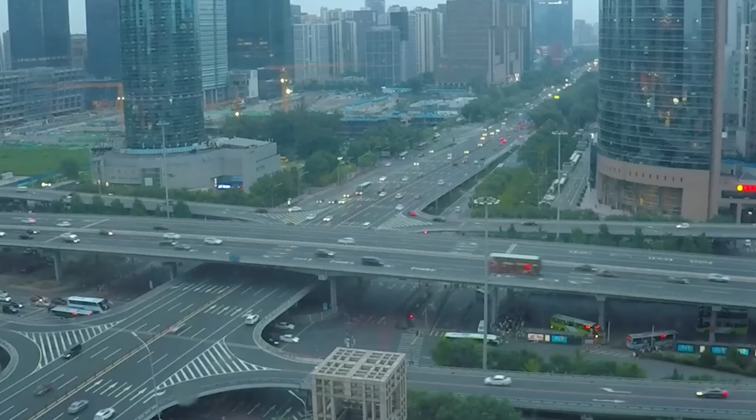Picture the last city you visited. Every overpass above you, every foundation beneath you, every high-rise cutting into the sky. Now ask yourself one question. What is holding all of it up? Not steel, not wood, not glass, concrete.

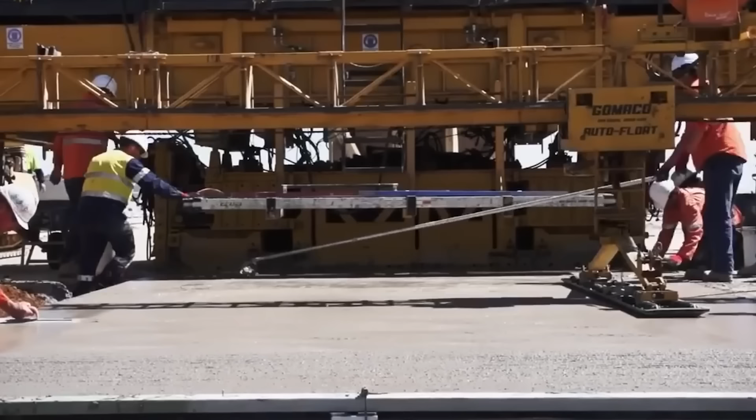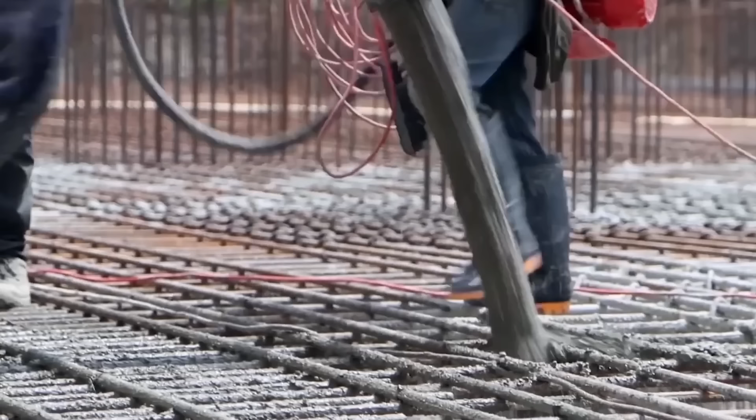The same material that built the Roman Pantheon 2,000 years ago is the same substance being poured into the ground right now as you watch this video. And for a century, the Western construction industry has been perfectly comfortable with that fact. Perfectly comfortable with a material that, by its own chemistry, pumps roughly 8% of all human carbon emissions into the atmosphere every single year. More than aviation, nearly as much as every road vehicle on Earth combined.

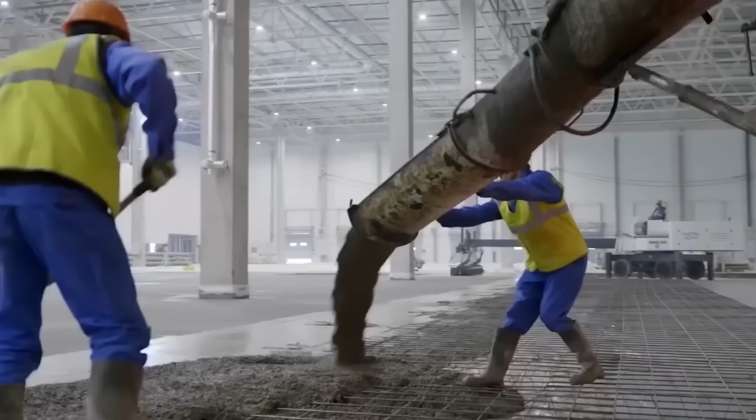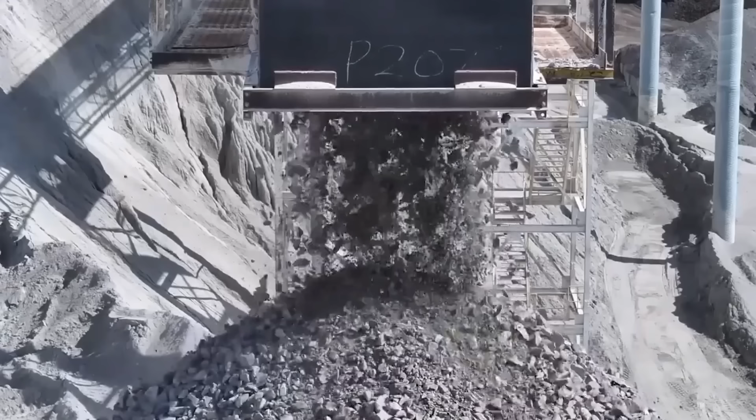But in 2025, a team of Chinese researchers published a finding that should have dominated every engineering headline on the planet. It did not get the attention it deserved, and the reason that matters to you is this. The companies and governments who did pay attention are already moving, and the gap they are opening up will not close easily. By the end of this video, you will understand exactly why this changes everything.

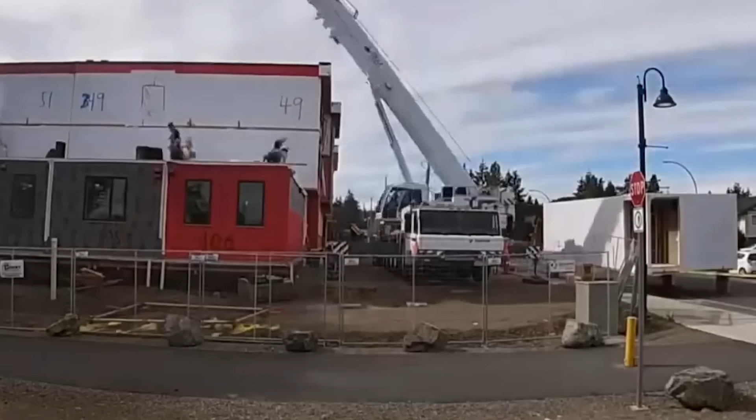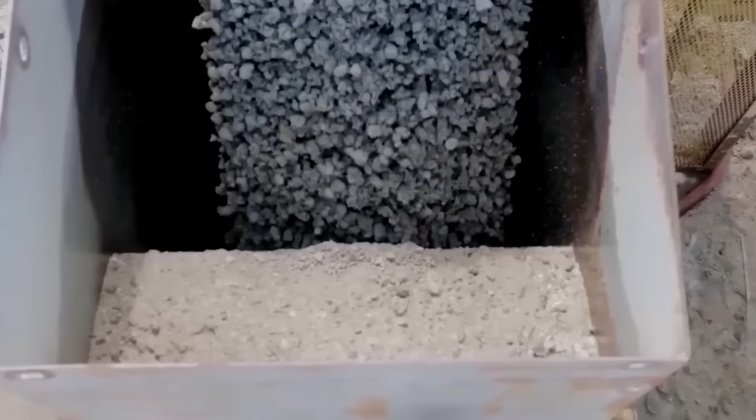To understand the weight of what just happened, you need to understand how deeply concrete is embedded into the architecture of modern civilization. Not just in buildings, but in the entire system of assumptions that surrounds them. Every building code written in every country on Earth is built around concrete's behavior. Every structural engineer trained in the last 100 years learned to calculate loads, stresses, and lifespans using concrete as a given. Every city on the planet that needed to scale, from Houston to Hamburg to Hanoi, reached for the same gray powder. And the numbers are staggering.

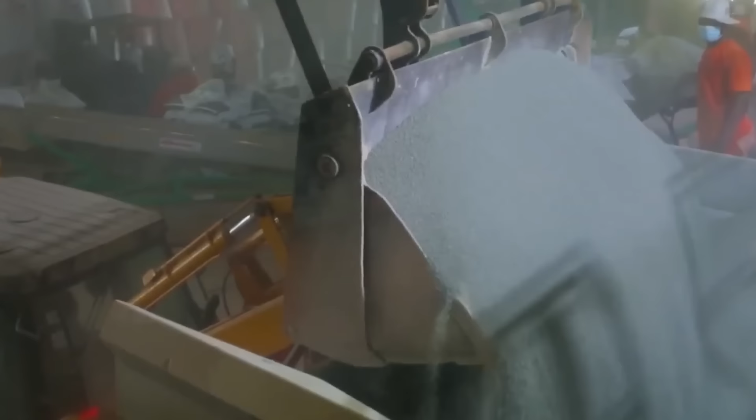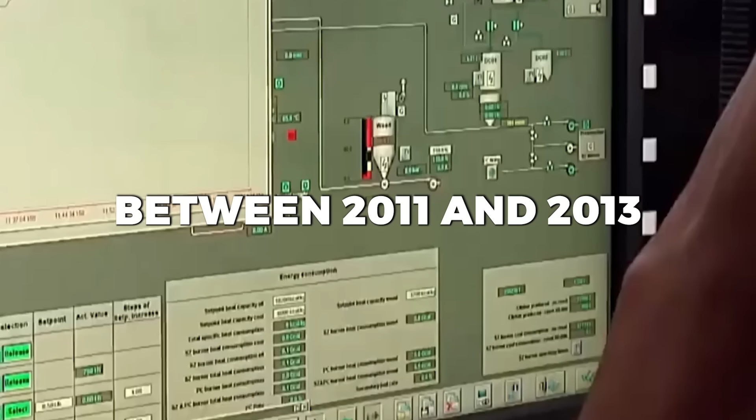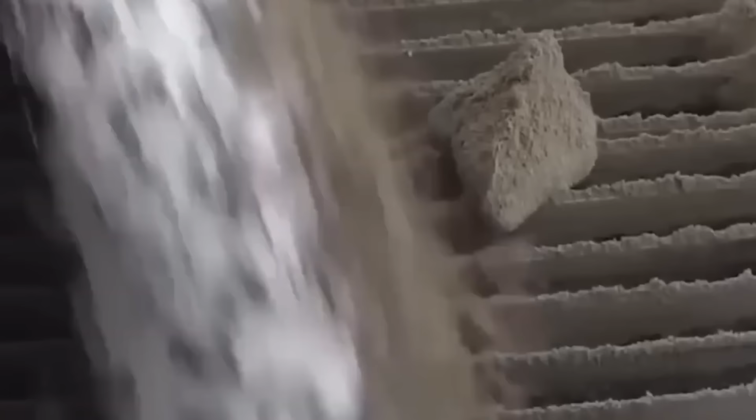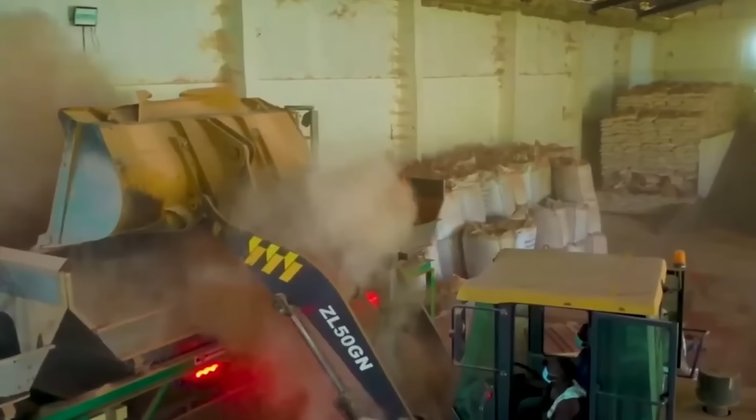The world produces over 4 billion metric tons of cement annually. China alone consumed more cement between 2011 and 2013 than the United States used across the entire 20th century. Not in a decade, not in a generation, in 3 years. Western construction companies like Lafarge-Holcim, Cemex, and Heidelberg Materials have generated hundreds of billions of dollars in revenue selling essentially the same product using essentially the same chemistry that has been in place since the Industrial Revolution. Their pricing power, their infrastructure, their patents, all of it depends on nothing fundamental ever changing.

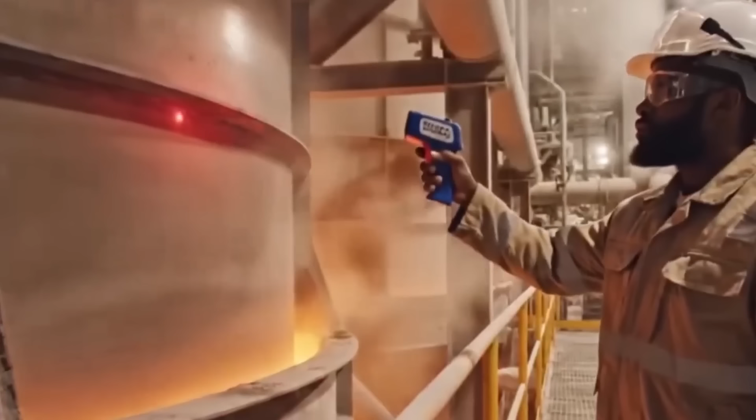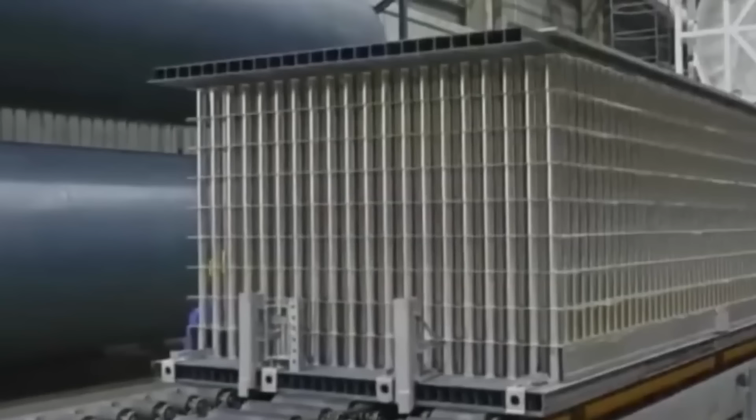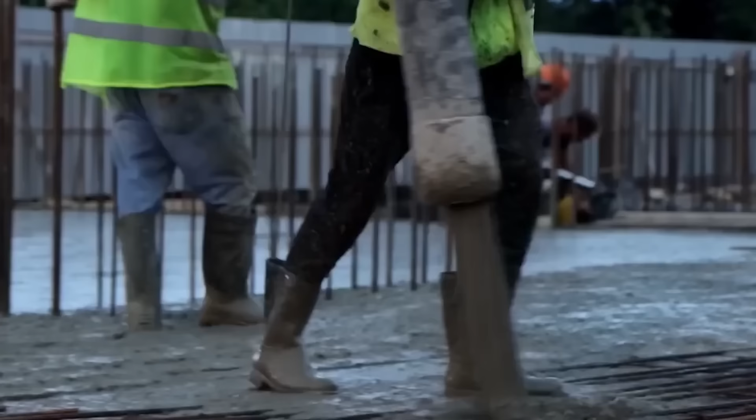But here's what most people are completely missing. Researchers were not ignoring the problem. They were trapped by it. The carbon in cement is not a side effect of burning dirty fuel. It is baked into the molecular transformation that makes cement work. Heat limestone past 1,400 degrees Celsius, and the rock chemically releases carbon dioxide as a direct byproduct of becoming the binding agent that holds everything together. Run your kilns on solar power, and you still get the emissions. The problem is in the recipe itself. That is the cage the industry has been locked inside for over a century, and that is the cage a research team in China just found a way out of.

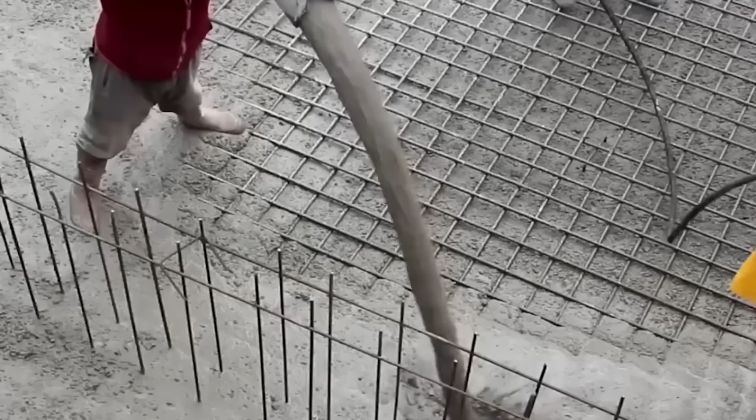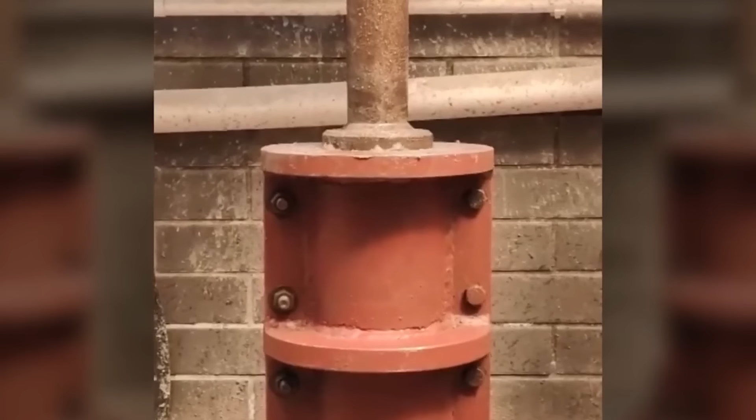Then something shifted. In early 2025, researchers working across Tongji University, the China Building Materials Academy, and Shanghai Jiaotong University published a paper describing a process they called compression casting of concrete. CCC for short. The premise was almost offensively simple. For generations, concrete had been poured into forms and left to cure under the influence of gravity and time. Vibration equipment helped settle the mix. Chemical additives were tinkered with endlessly. But the fundamental act of making concrete had never changed. You mix it, you pour it, you wait.

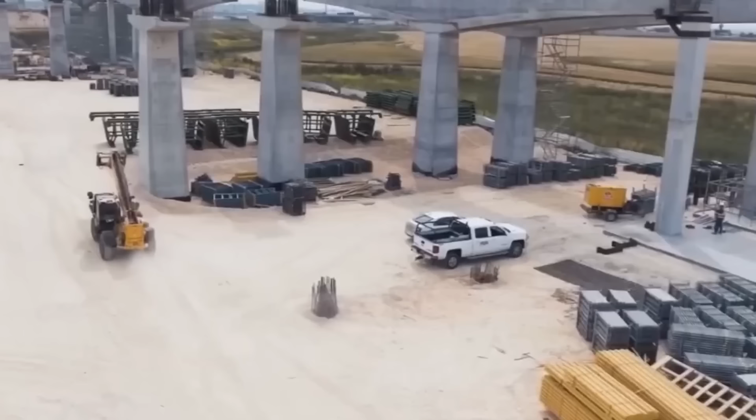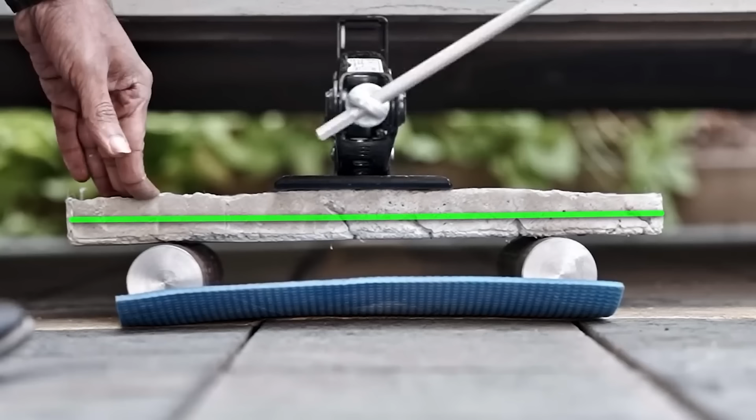What the Chinese team asked was a question nobody had fully pursued at scale. What happens if you apply serious mechanical pressure to fresh concrete before it hardens? Between 5 and 15 megapascals of force, the kind of hydraulic pressure found in heavy industrial pressing equipment, was applied to the wet mix from the outside in. The particles were forced together so tightly that trapped water and air had nowhere left to go. They were pushed out of the structure entirely. The result was a concrete with roughly 45% fewer internal voids than any standard mix.

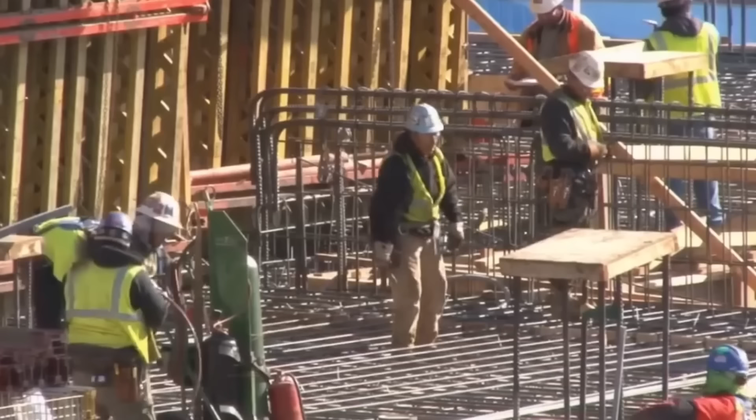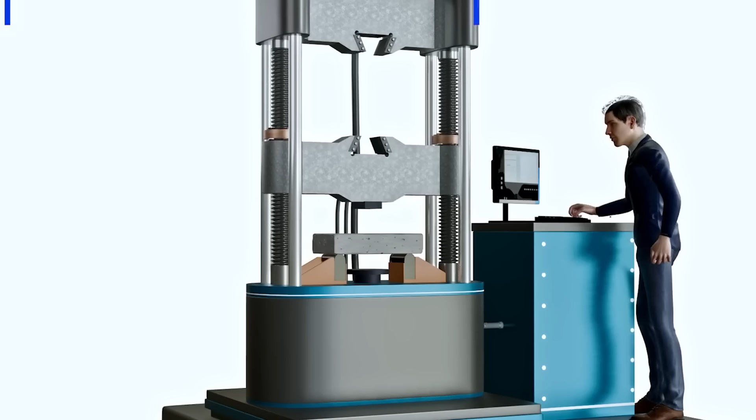That number matters enormously. Those voids are not just empty space. They are where every major failure mode in concrete originates. Cracks begin at voids. Water enters through voids. Road salt and seawater chemicals travel through voids to reach the steel reinforcement inside, where they corrode it silently over years until a structure begins to fail from the inside. Freeze and thaw cycles destroy concrete by expanding water trapped in those voids.

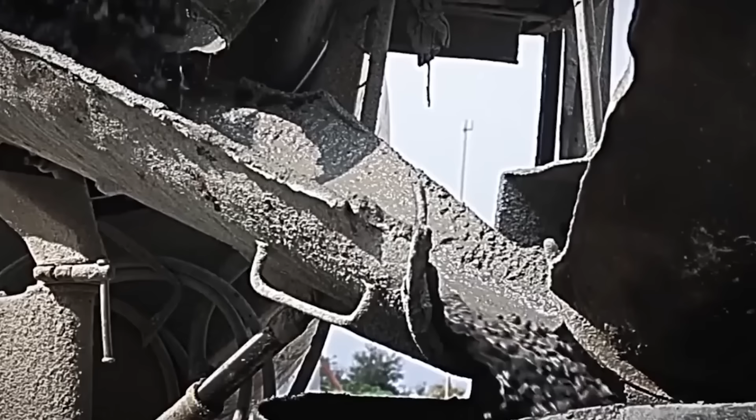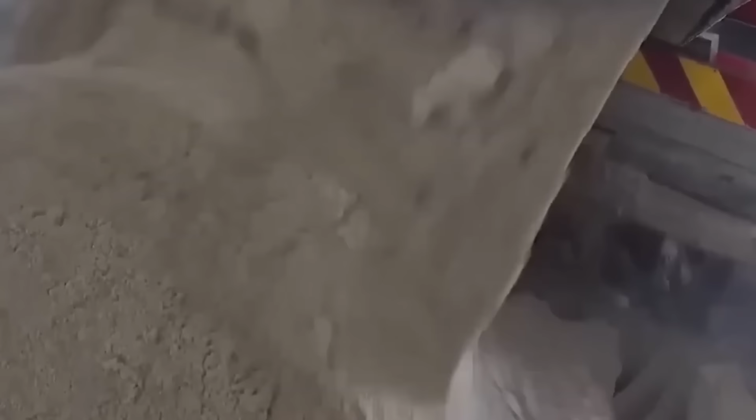Eliminate the voids and you address nearly every long-term weakness of the material simultaneously. Compressive strength increased by over 80% in the highest pressure test batches. Resistance to water penetration, chemical attack, and thermal cycling all improved substantially.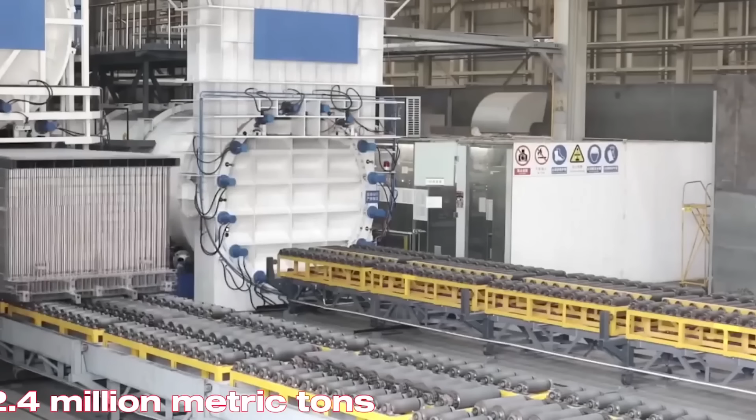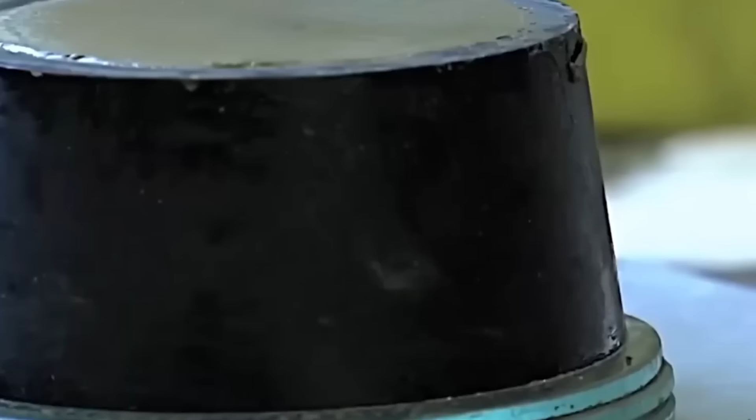And here's the detail that made structural engineers put down whatever they were doing and read more carefully. Not one new ingredient was added to the mix. No exotic polymer. No rare additive. No reformulated chemistry. The same materials, handled differently, produced a fundamentally superior product.

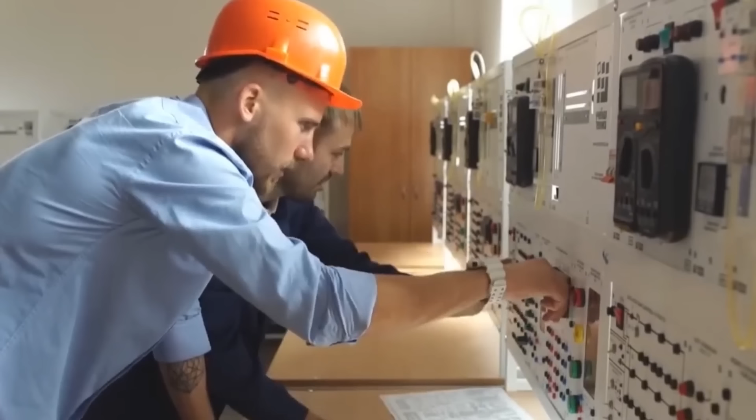But that is not the whole story. Because the team did something that broke with every convention of the industry. They published everything. Not a teaser. Not a licensed summary. Every raw data set. Every microscopic image of the internal structure. Every force measurement from nanoscale mechanical testing. Released publicly under an open license for any researcher on Earth to download, replicate, and verify.

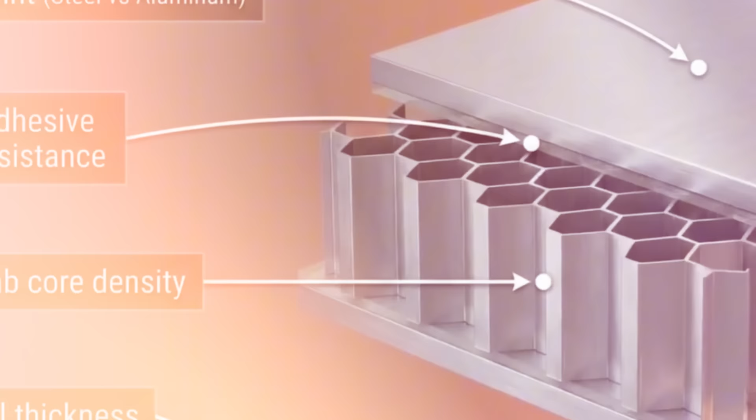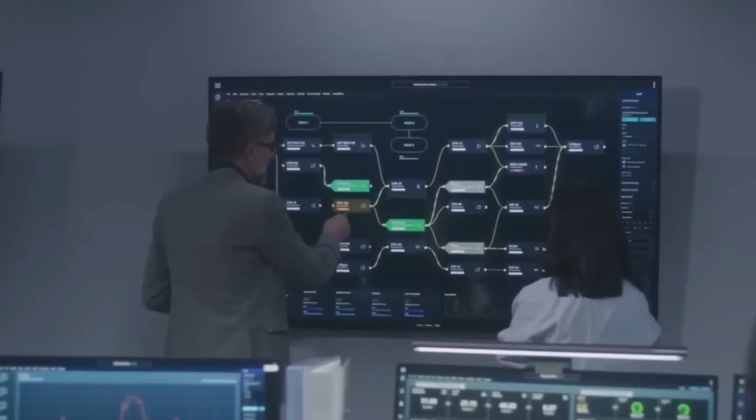In an industry where proprietary methods are fiercely protected and competitive advantages are guarded through litigation, that level of transparency was almost as shocking as the results themselves. And what they discovered next caught even the engineers doing the verification work off guard.

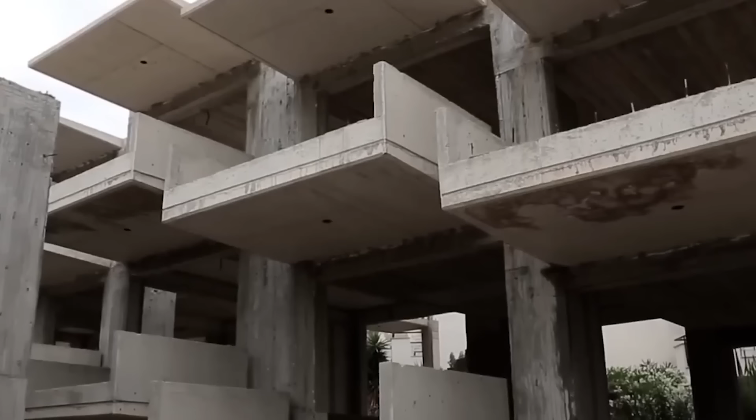At the boundary between cement paste and stone aggregate, a microscopic zone known in materials science as the interfacial transition zone, standard concrete has always had a fundamental structural weakness. This zone is looser and more porous than either material on its own, which means it is the first place stress fractures form when a structure is under load.

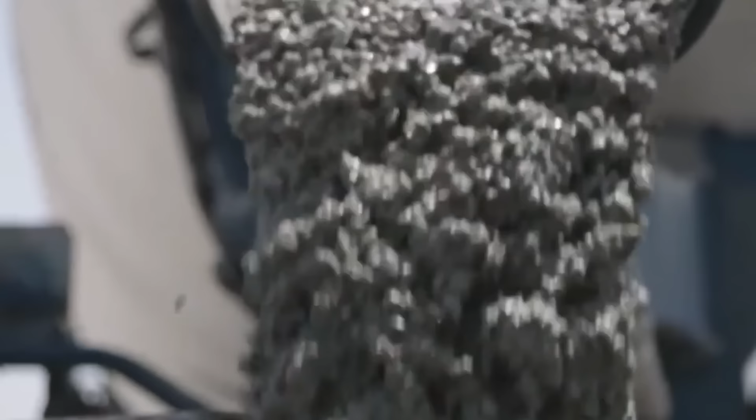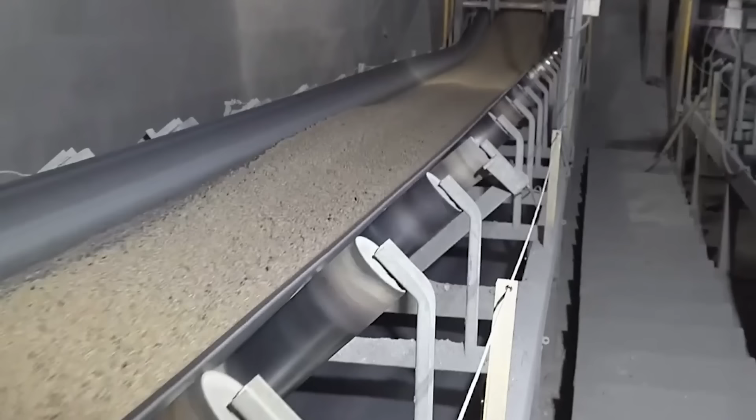Under compression casting, the interfacial transition zone showed 35% fewer voids than in conventional concrete. The weakest link in the entire structural chain had been directly reinforced. Not by adding material, by reorganizing the material already there. When independent labs in Germany and Japan replicated the core experiments, their results matched. That is when the industry realized this was not a research curiosity. It was a production technology.

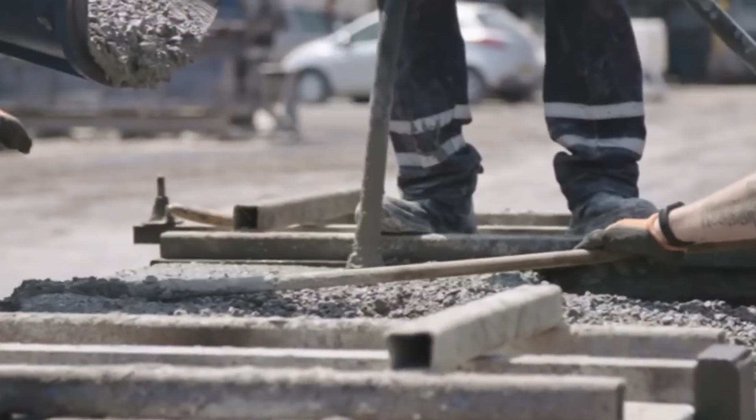Here is where the panic started. 34 international patent families filed in 2025 and early 2026 now cite the original Chinese research, with filings originating from Germany, Japan, South Korea, and the United Kingdom. These are not academic references. Patent filings represent companies and research consortiums committing legal and financial resources toward a technology because they believe it will define the next generation of their industry.

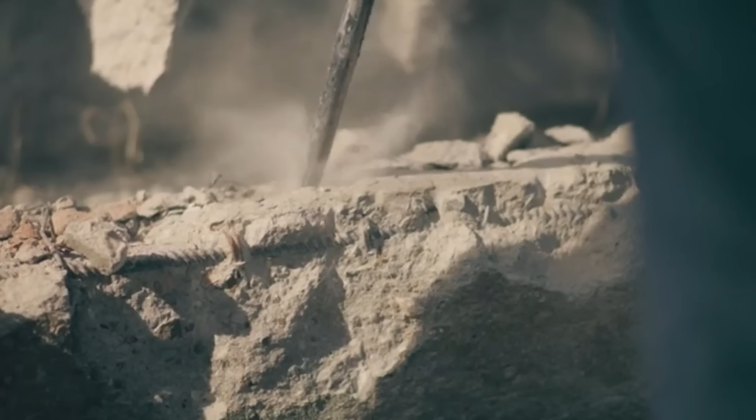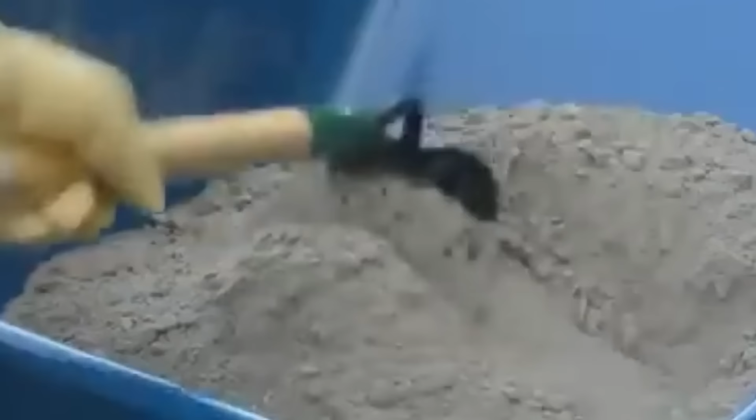LafargeHolcim, one of the largest cement producers on the planet, with annual revenues exceeding $27 billion, signed a 5-year licensing agreement with Beijing Cement Group to adapt compression casting methods for European prefabricated construction. A company that size does not sign a 5-year deal with a Chinese research partner because the results look interesting. They do it because they are behind and they know it.

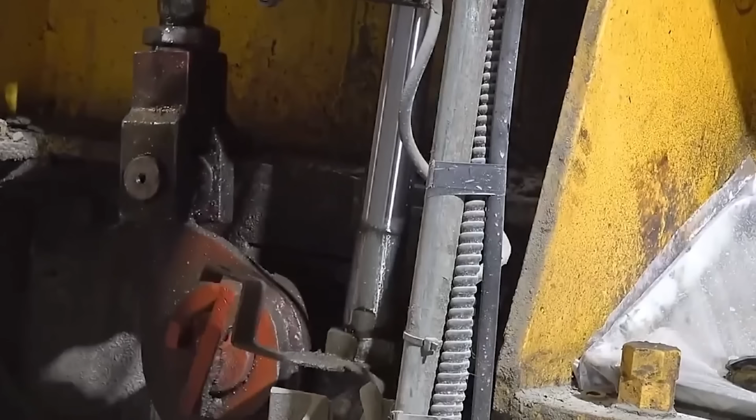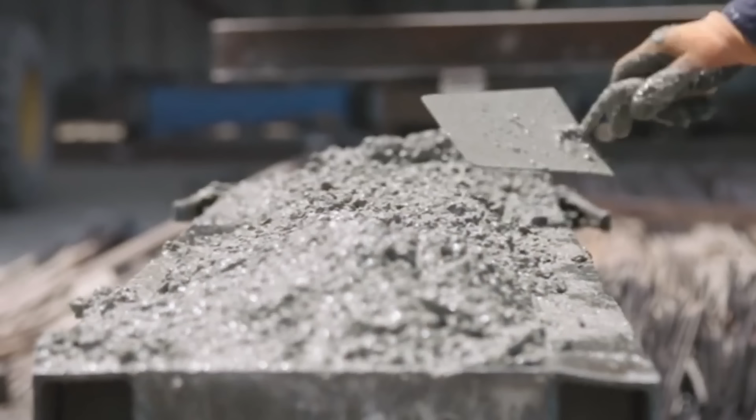In Germany, a government-funded research consortium ran full-scale compression cast deck trials on a live highway project near Berlin. In Japan, the Obayashi Corporation, one of the country's largest construction conglomerates, launched a formal joint research program with Beijing University of Civil Engineering, directly targeting cement reduction targets tied to the 2025 Osaka Expo. South Korea's Hyundai Engineering announced domestic manufacturing plans for a structurally related panel technology, positioning it as the foundational material for its next phase of smart city development.

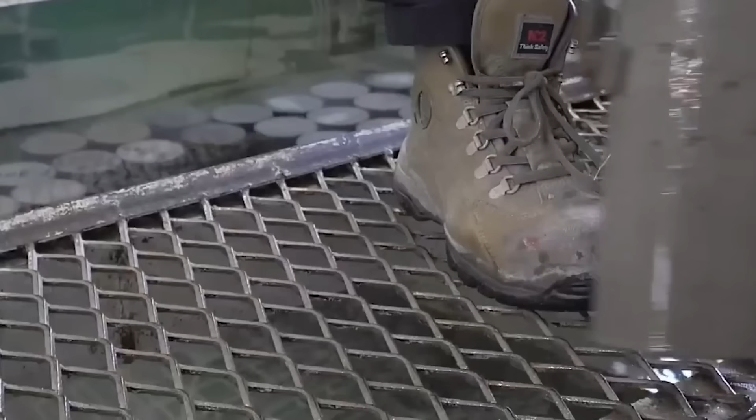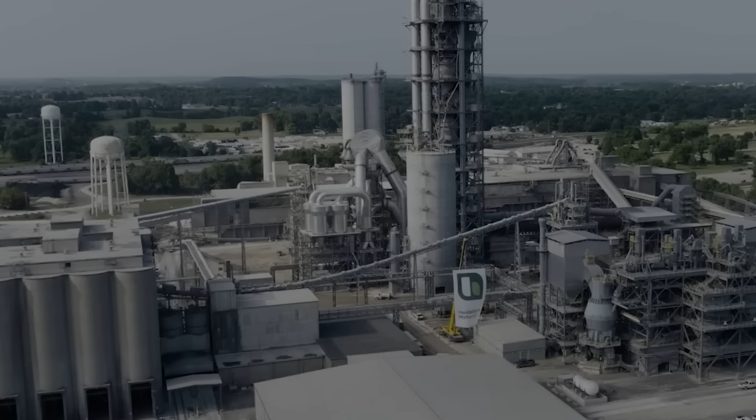But wait, it gets worse for anyone still dismissing this as a regional story. In 2026, China exported 12.4 million metric tons of carbon-cured concrete additives to the United States, the United Kingdom, and Southeast Asia. That represents a 10-fold increase compared to just 2 years earlier. The global construction supply chain is already reorganizing around Chinese material science. The shift is not coming, it is underway.

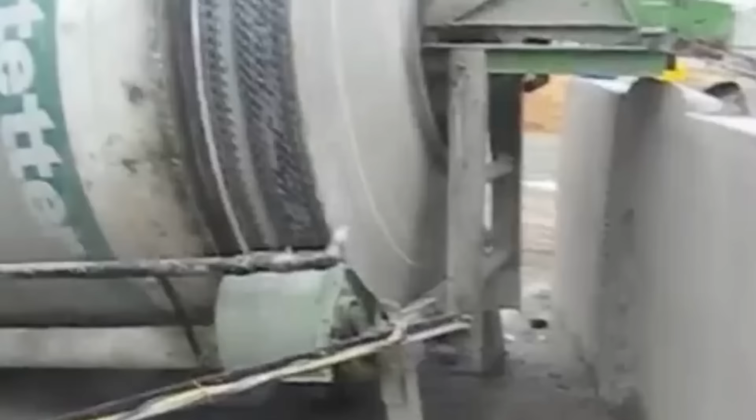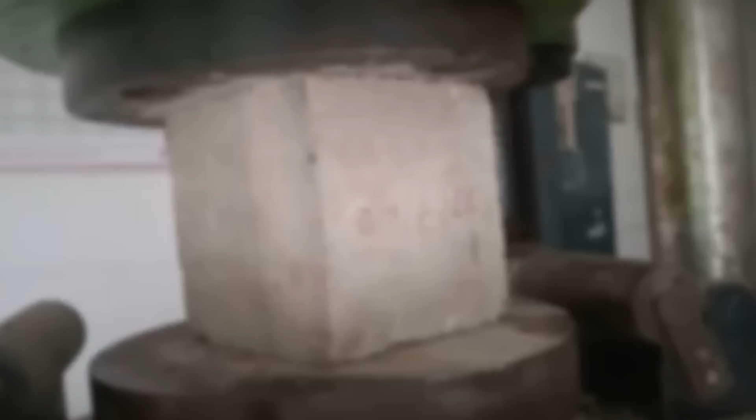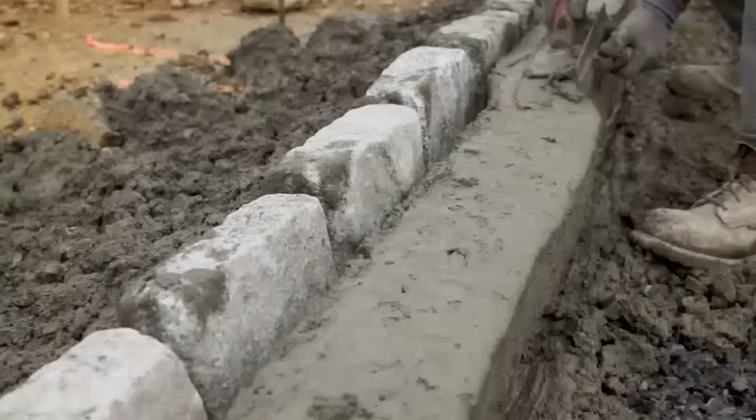The economics driving this are ruthless in their clarity. In carbon-taxed markets across the European Union, a 40% reduction in cement content translates directly into lower compliance costs per structure. Combined with the strength improvements that reduce the total material needed per project, and the durability gains that extend maintenance cycles by decades, the total cost picture for developers adopting CCC is dramatically better than for those who do not. This is not an environmental preference. It is a financial advantage that compounds over every project.

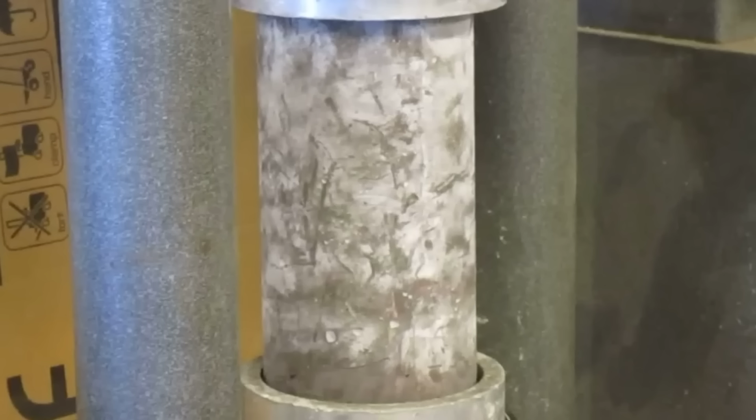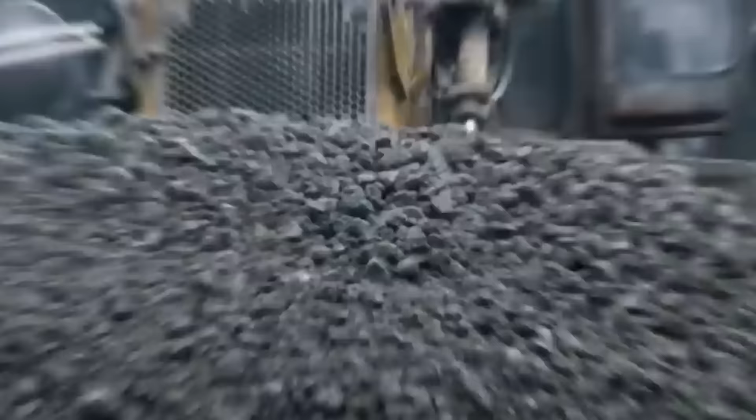But here's what most people are completely missing. And this is the part that deserves your full attention. Running in parallel to the compression casting story, a Chinese company called Broad Group was quietly solving a related but distinct problem.

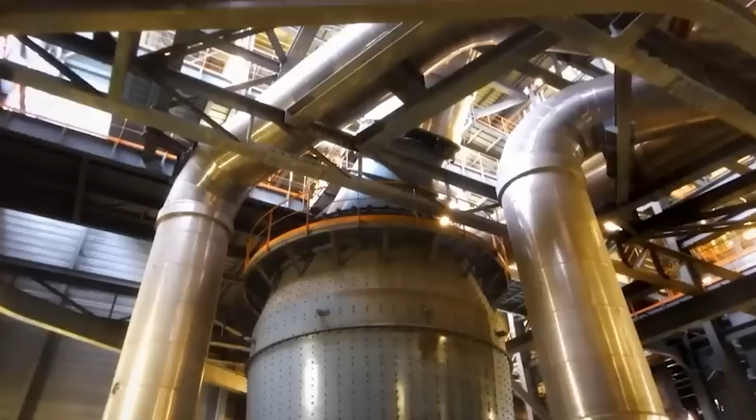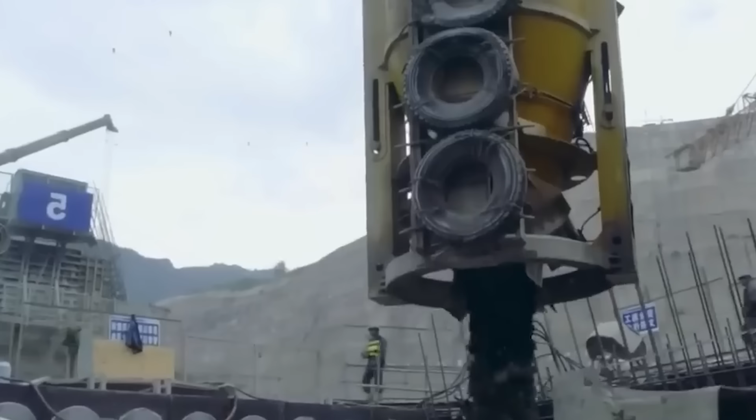Not how to make concrete better, but how to build structures that need far less of it in the first place. Their technology, known as BCore, uses a panel system derived from aerospace engineering logic. Two thin steel skins separated by a geometric lattice of hollow steel tubes, precision engineered to distribute structural stress the way an aircraft fuselage does, through geometry rather than mass.

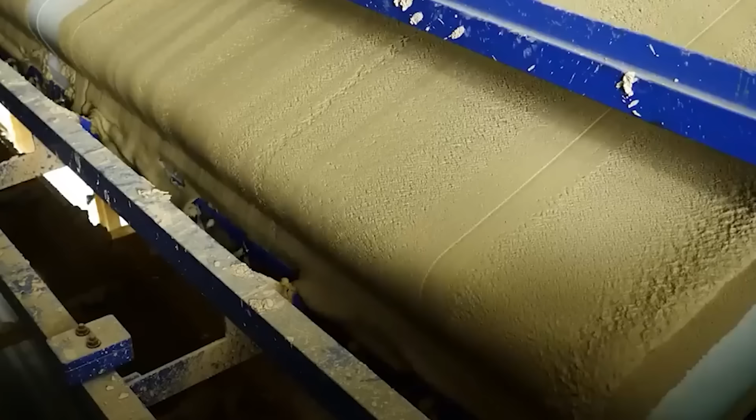The result is a structural panel that weighs less than 1/10 of an equivalent reinforced concrete slab, while carrying comparable loads. In 2025, a 10-story building in Changsha was assembled using BCore modules in under 30 hours. The workers were not rushing. The system is simply designed to go together the way a precision instrument goes together. Every component made to fit, every connection designed for speed.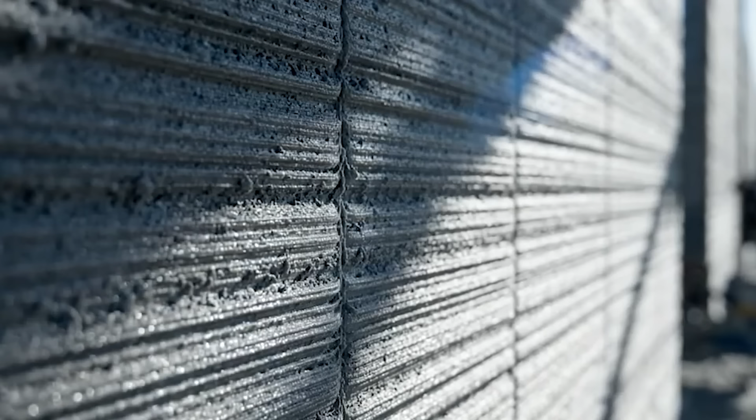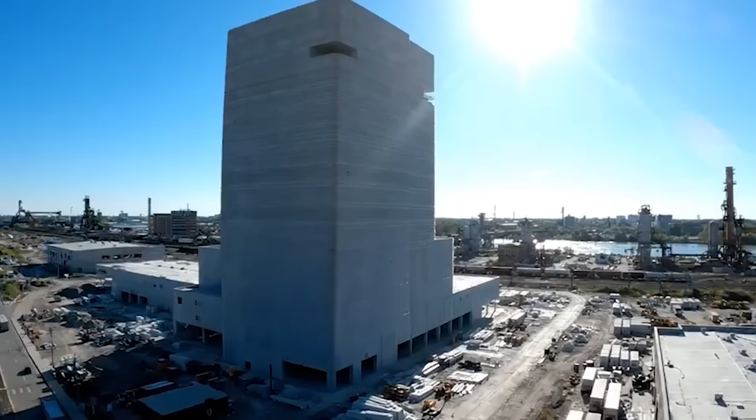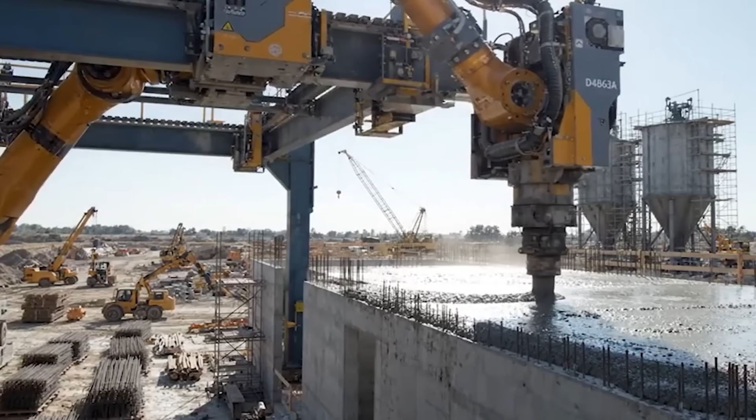What made global engineers take seismic performance data seriously was the physics advantage in earthquake zones. Concrete is heavy. Heavy structures generate enormous forces during ground movement. BCore's dramatically lower mass changes the structural response to seismic events in ways that conventional concrete frames cannot easily replicate. For the densely populated earthquake-prone regions of Southeast Asia, South Asia, and Latin America, that is not a marginal improvement. It is a different category of safety.

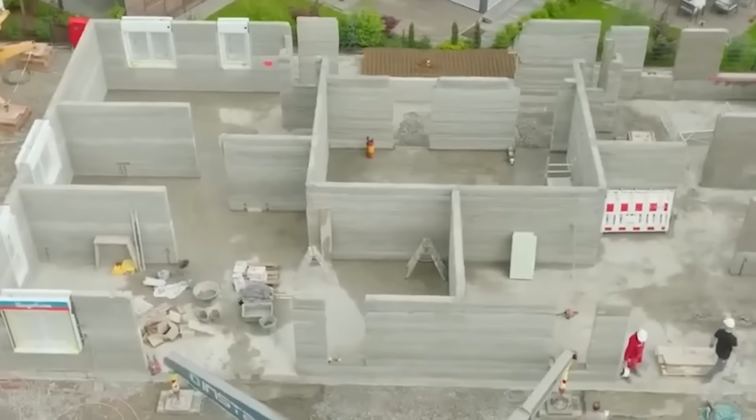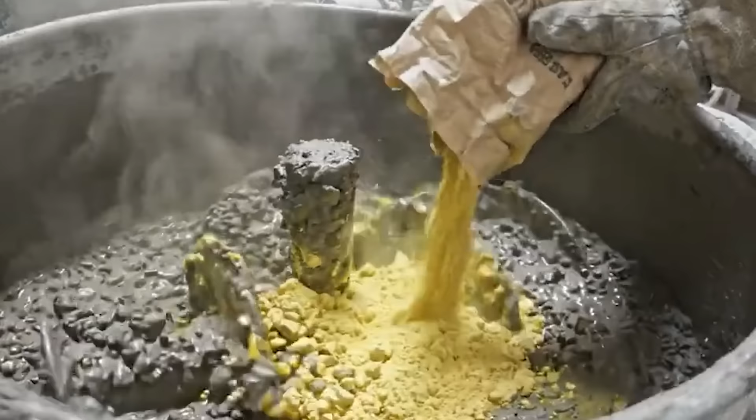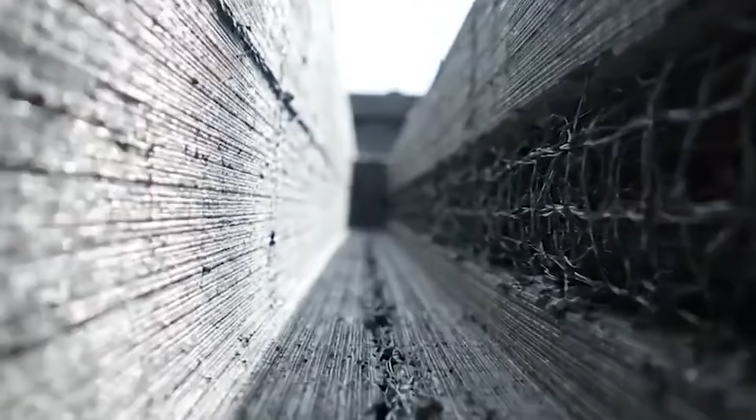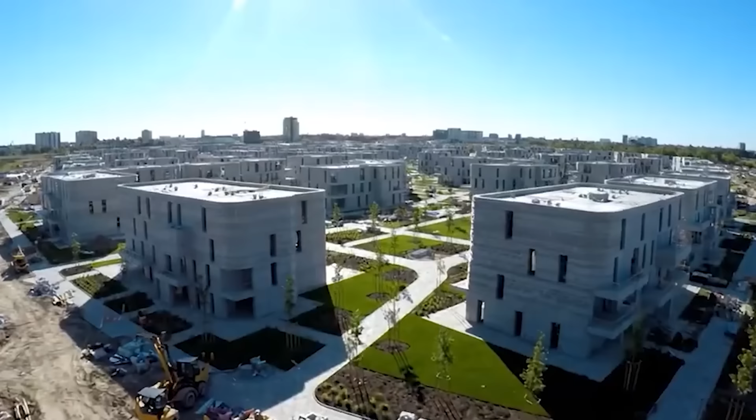Paint the picture forward from here. Life cycle models built on the 2025 research suggest that applying compression casting to just 30% of new structural concrete globally could eliminate approximately 850 million metric tons of carbon dioxide annually. For reference, that exceeds the total annual emissions of Germany. Every power plant, every factory, every vehicle, every farm, combined. One process change, applied to less than a third of global output.

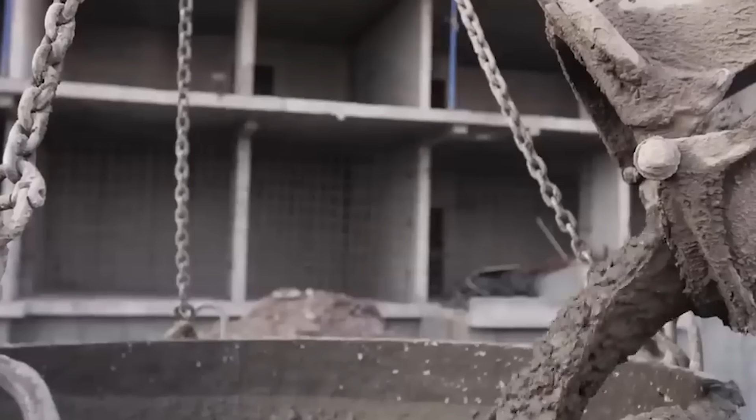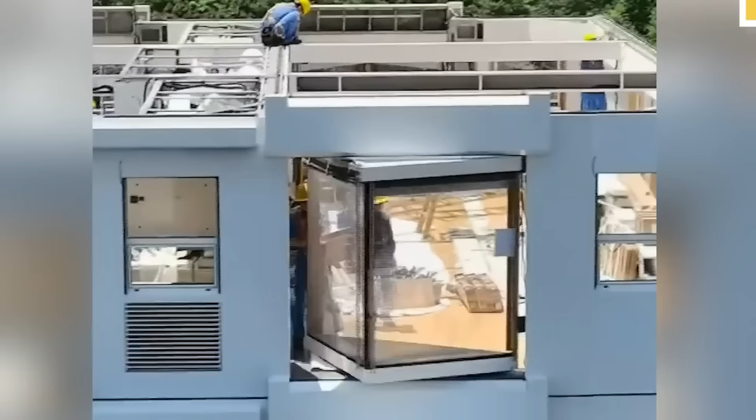Delivering that result. The people in this industry who understood that number in early 2025 did not wait for a government mandate or a trade publication to validate it. They filed patents. They signed licensing agreements. They broke ground on manufacturing facilities. Because in any competitive market, the company that moves first on a structural cost advantage does not just win the next contract. It resets the pricing expectations for every contract that follows.

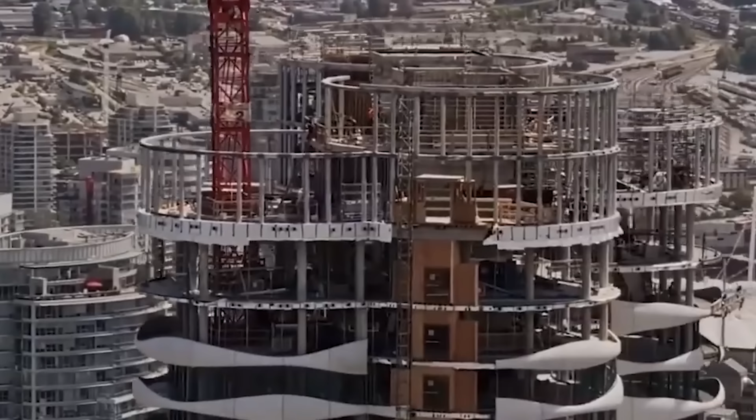The barriers to adoption are real. Building codes move slowly. Equipment retrofits require capital, and workforce training takes time. None of that is an argument against the technology. It is simply the friction between what is scientifically possible and what becomes globally standard. And that friction is being overcome right now, project by project, country by country.

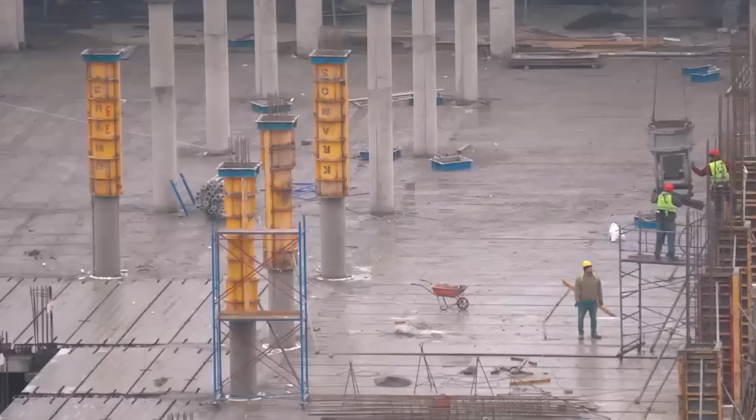The question that should be sitting with you is this. If a breakthrough this significant was hiding inside a process used billions of times every single day, what else is hiding in plain sight? And who is going to find it first? Every road you have ever driven on, every bridge you have ever crossed, every building you have ever walked into, the material holding all of it up has not fundamentally changed in over a century.

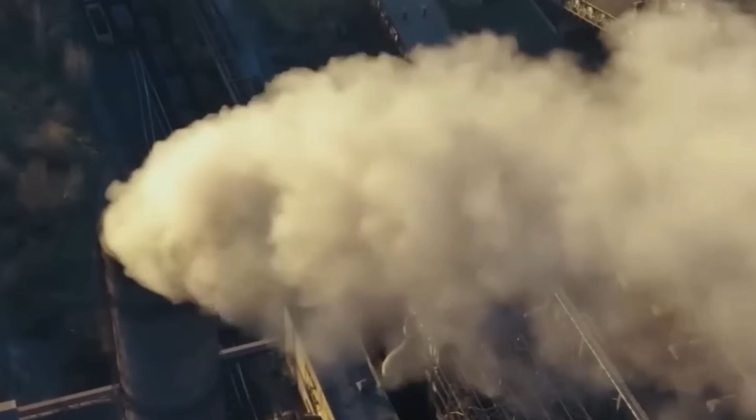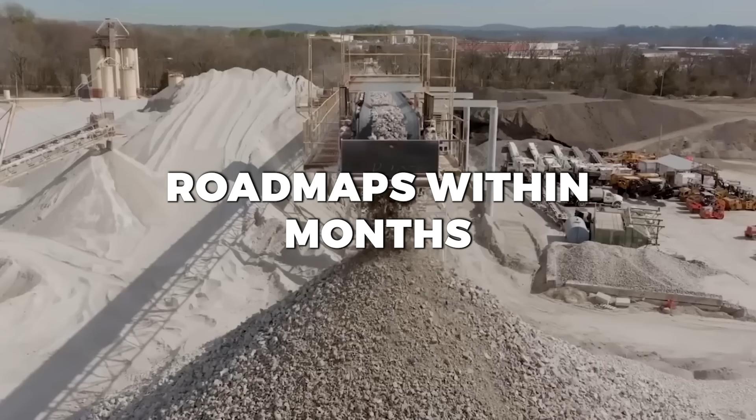Until now. China did not announce this with fanfare. They published the data. They let the math speak. And the math was loud enough that the largest construction companies in Europe, Japan, and South Korea started rewriting their roadmaps within months. That is how real breakthroughs move, not through press releases, through receipts.